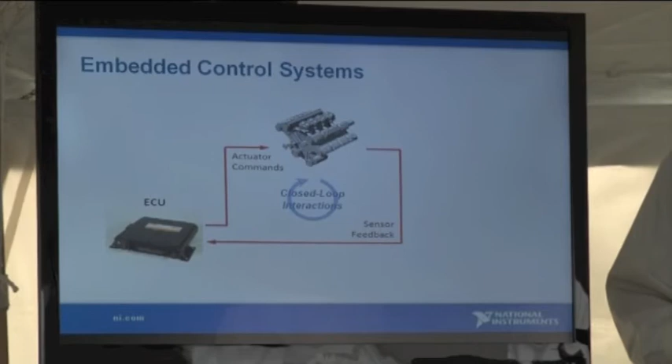Okay, so given all of this, this is a problem that's been around for a while, embedded software, and there's a good technique being used to address it called hardware-in-the-loop testing or hardware-in-the-loop simulation. And the reason this is necessary is because there's a challenge when testing embedded control software.

Okay, so in this particular illustration, I've got an engine control unit, but you could really replace it with any mechatronic system here, and the same would be true. Most of the complexity being added into the system is being added in this form of software here that is controlling how the mechanical system is going to operate.

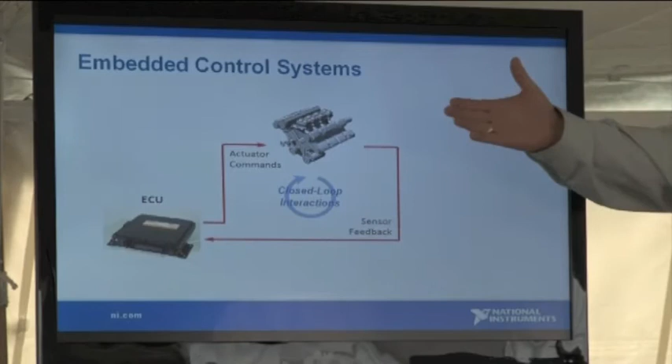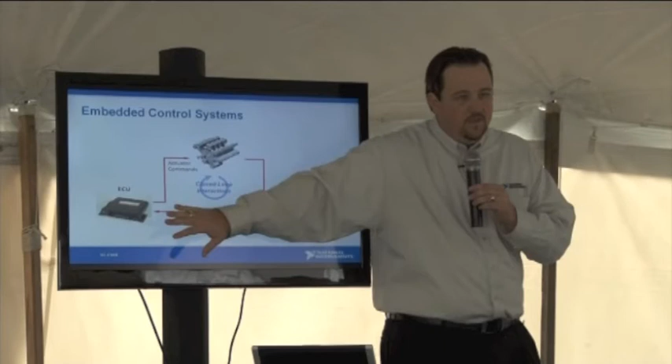Okay, so then as a test engineer, you would say, okay, if a lot of the new complexity and the new errors I got to find are in this component here, I need to find a way to test that more. And then the challenge there is that you cannot test control software completely without the rest of the system that it is intended to control.

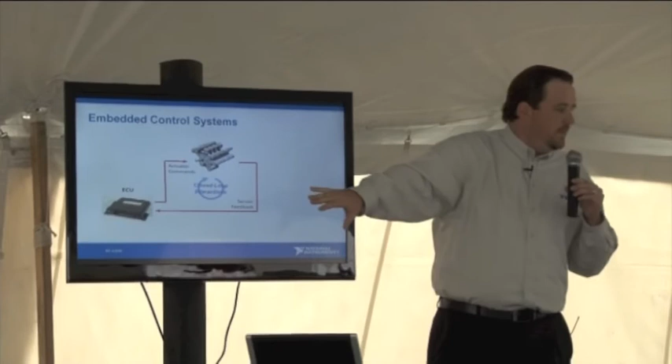And that's because there's a closed loop coupling or a closed loop interaction between the software and the engine. So many of you in this room may already know this, but effectively your software is reading the current state of the system and making adjustments on the fly to automatically control how it operates.

And so you need the system to test the software completely, but you can't always scale your test resources, your test capacity, proportionally to the amount of additional testing you need. You can't just add 20 dyno cells necessarily to scale. That doesn't scale with the other factors you're trying to balance of budget and timeline for the project. And so that's where hardware-in-the-loop testing comes in.

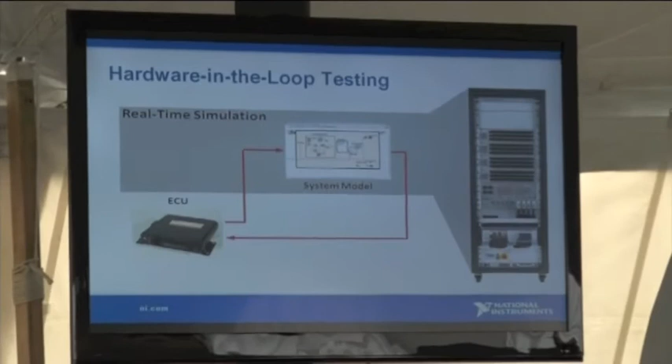And this is a technique that's been around really for decades, going back into the mil-aero and aerospace industries that have been doing simulation with C-based models for years. But it's really been refined and optimized now by the automotive industry with their shorter, leaner development cycles. And what we do in hardware-in-the-loop testing is we replace the physical system with a real-time simulation. And that real-time simulation tricks the unit under test, the embedded control unit, into thinking that it's talking to the real world. And it does that through electrical simulation.

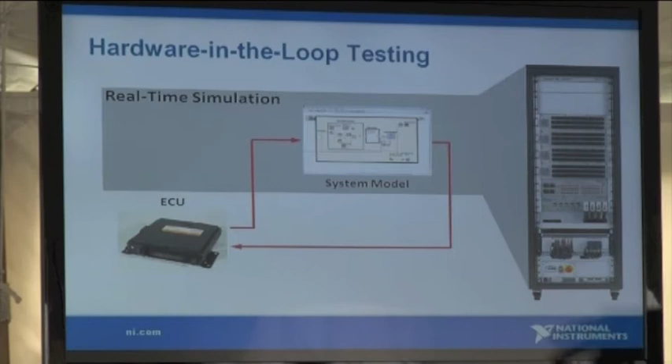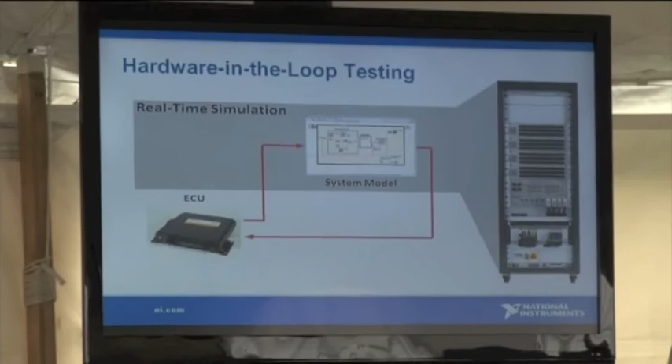So if you think about it, if you put yourself in the shoes of an ECU, or in the box of an ECU, what do you know about the world around you? I mean, you've got Ohm's law and time. You know voltages, currents, loads, and then the time or the waveforms, the transients as they change. And that's how data is communicated from the physical world through sensors and actuators into the electronic control unit, or the software world.

Okay, and so hardware-in-the-loop simulation is simulating the dynamic behavior, the response of the system, and enables you now to have more repeatable testing. It'll enable you to do test scenarios that you ordinarily would not want to test. I was talking to Embraer earlier this summer, and they were talking about their Iron Bird, and the way they described it was, if you want to test how your plane is going to operate when both engines fail, that's not a test you want to do in the air. And there's many examples like that in all of these industries. And using simulation will allow you to test for those scenarios that you hope never happen, but at least to know what will happen if they did.

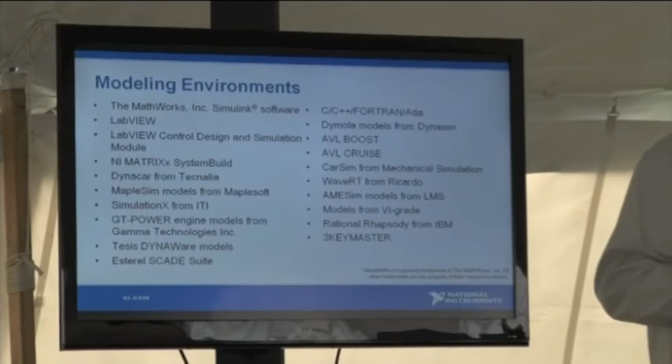And so hardware-in-the-loop testing has been a technique that continues to grow in its usage. And if you recall the graph I showed previously, with the exponential growth in the content of embedded software, and as it is leaking out into industries beyond auto and aero, into white goods and medical devices and growing there as well, there's a lot of investment going on in the area of hardware-in-the-loop testing. And a lot of that investment is being made by the tools providers. There's a big need there, and so tools providers, companies such as National Instruments, are wanting to provide the tool that everybody wants. And so there are investments into the testing tools, but what I want to specifically talk about is there's been a lot of investment into the modeling tools.

All right, so critical to doing hardware-in-the-loop simulation is you have to have what's commonly called a plant model, or a mathematical equation that can be executed deterministically in real time to simulate the response of the system to the inputs and publish those out via the outputs, the sensors, to the ECU. Okay, and so you've got to capture the dynamics to whatever degree of fidelity or accuracy is necessary to validate your particular system. And so here's a list. It's not exhaustive, but it's a fairly complete list of tools that I've run into that are being used to create these real-time simulations for HIL.

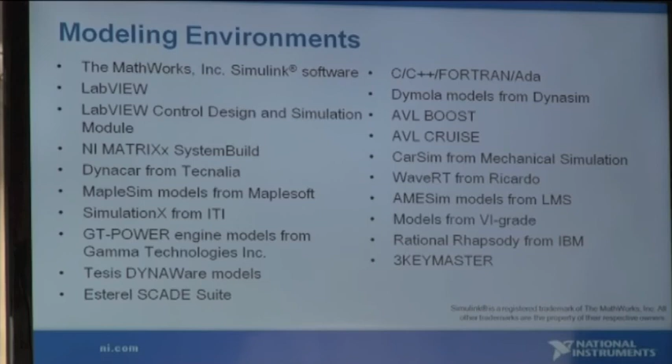And that really brings me to the first trend that I've been seeing in the area of physical or mechanical testing. And it's really that engineers are starting to realize that there is a lot of investment that's been made into those models, whether it be investment in your own corporation, and by simply asking, you can actually find a very accurate plant model of your system that you could leverage. Or in some cases, particularly in automotive, there are modeling environments that actually provide ready-to-use models. So you don't even have to understand the mathematics and physics behind creating a model. You just need to fill in the parameters that are specific to your system, like the width of a tire, the bore of an engine, the friction of the contact of the tire with the road, and so on.

And so really this first trend or technique that in the last couple of years I've started to hear more and more use cases about is really leveraging these HIL models, the models traditionally used for HIL, to improve the physical testing.